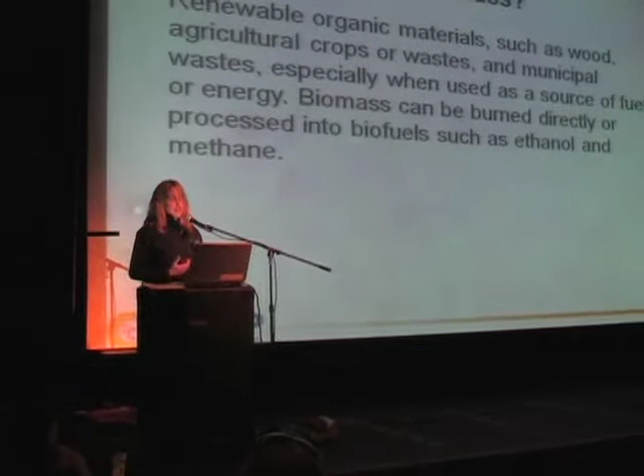Okay, I'm going to go ahead and go right into a little bit of background on what biomass is and what we're going to be speaking about tonight. Essentially, when you go to the dictionary definition of biomass, it's organic materials — wood, municipal waste, agricultural crops — that you can use as a fuel source for energy, and that's really what we're talking about here. It can either be burned directly or processed into biofuels such as ethanol or methane. We're not talking about that here.

There is work being done at the university related to that through the School of Natural Resources and Agricultural Sciences. They're also involved in other work, such as looking at the concept of short rotation woody biomass crops, which is something being done in other places in the world. That work's being led by Steve Sparrow, who's actually here this evening. Steve, can you raise your hand? I can't see him, but he's over there. Okay, great. He's a great resource we have here locally, and unfortunately, because this is such a broad topic, we couldn't bring everyone in to speak. We almost thought about having a phase 1 and a phase 2 for this.

Today we're talking a little bit about combustion technologies, about how you might use biomass for either heating your home or generating electricity.

There's a whole other side to this question, which is where are you going to get that biomass from? Is that from growing a short rotation crop, like Steve's been looking at? Is that from harvesting fire breaks? There's all kinds of different options for sustainable harvesting of biomass for energy projects, and a lot of people involved in that. We've thought about having a separate lecture series on that topic. Let us know if that's something you're interested in hearing about.

It's interesting to note that Fairbanks was actually electrified by biomass back in the 1920s. I don't know if any of you have seen the historic photos of the downtown Fairbanks power plant, but it's a pretty striking image I wish I had thrown into this presentation, showing a fairly non-sustainable use of biomass in the interior.

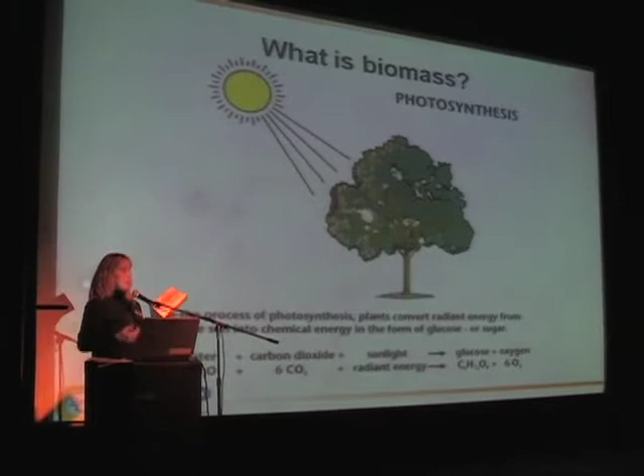Where does this mass come from? When you ask them, a lot of times they'll say it comes from the soil. That's a really common answer—that the tree is pulling up nutrients from the soil, and that's what's creating this wood mass. That's partially true, in that that's where the water content is largely coming from.

But the truth is that this is really stored solar energy in this log. We're taking carbon dioxide from the air and sequestering it in this piece of firewood, or this tree when it was growing, and combining that with water to create glucose and various kinds of carbohydrates, with oxygen produced as a byproduct. So this is basically mostly carbon dioxide that's been sequestered from our atmosphere. When we go ahead and burn this log, it's going to release that carbon that was sequestered during the lifetime of the tree.

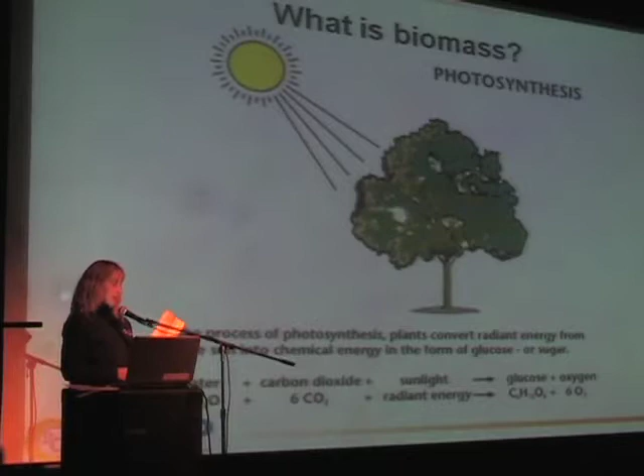So when we consider whether this is renewable energy, it really has to do with whether you're replanting that tree, or whether that land is now being paved over for parking lots or something like that. Then maybe it isn't sustainable, maybe it's not considered renewable. But in general, it's assumed that you're replacing the biomass that you're cutting down for whatever energy use you intend to make of it.

In the lower 48, biomass is actually used quite a bit for power generation, mostly industrial uses—about 80 to 90% is really for industrial technologies. What's generally done is that biomass is combusted, used to generate steam, which then drives a steam turbine. It's a fairly robust, not very new technology, and it's been done on a large scale in many places in the lower 48.

Here in Alaska, until about a decade ago there were 2 large-scale mills in southeast that were using biomass energy for electric generation for on-site use. In the U.S., about 1% of total generating capacity is from biomass, primarily waste products from wood processing facilities, sawmills, and things like that. As a whole, biomass accounts for about 4% of total energy use in the U.S., and that's quite a bit higher than 1% for power generation because of ethanol and fuel production from biomass.

That's become a bigger component of our overall energy use in the state. Worldwide, biomass has been used for millions of years for heating and cooking, and today it's still the primary energy source for half of the world's population—not necessarily for electricity, but for heating and cooking. Europe is currently the leader in clean conversion technologies, using biomass for heating or power generation with reduced emissions. Again, when you're talking about clean biomass, you're still combusting the wood, so you're still getting carbon dioxide. It's just a question of what other byproducts or particulates result, and how you can reduce those types of emissions.

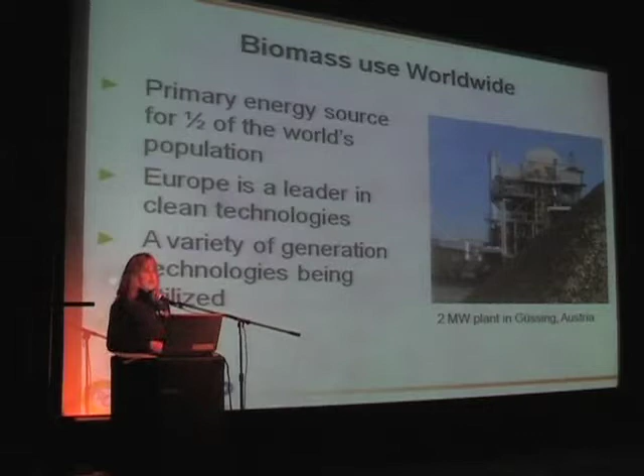Advantages of biomass: it can supply on-demand baseload power and heating. It's available when we need it, unlike wind or solar energy. We know that it's available as long as we have enough wood in our wood pile, enough wood chips, or municipal waste to run our systems. It's available year-round with storage.

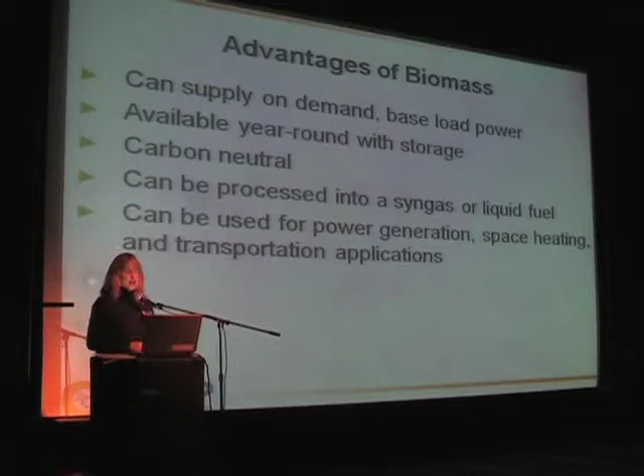It's carbon neutral, we talked about that a little bit. It can be processed into a syngas or a liquid fuel for storage, and it can be used for power generation, space heating, or transportation applications, which is nice as well.

Disadvantages are it's expensive to handle because it's got a low energy density. The number of BTUs in this log is significantly less than a comparably sized gallon of gasoline. So that means it's got to be used near its source, because it's just not economic to transport it long distances. It's labor intensive, which can be a good and bad thing.

What that means is there's potential for more local job creation, because the money you're going to spend to harvest biomass and use it in a system is probably going to be expended locally, close to the source, close to where the fuel is available. That means you're supporting local economic development, often with these types of systems.

Smaller scale technologies for power generation are still emerging. It's challenging at the smaller level to generate power from biomass. We're going to hear about one of those systems that is in development this evening with Chena Power.

And small-scale production of liquid fuels is similarly expensive. This is typical to a lot of the technologies we've been studying at the university, and the fact is that you often can do these things technically.

Technically, it's not impossible to do a lot of these types of things. It's a question of how much money do you want to spend on it, and what are really your goals? Are you looking for an economically viable way to produce liquid fuels from biomass at the small scale, or do you just want to do it at any cost?

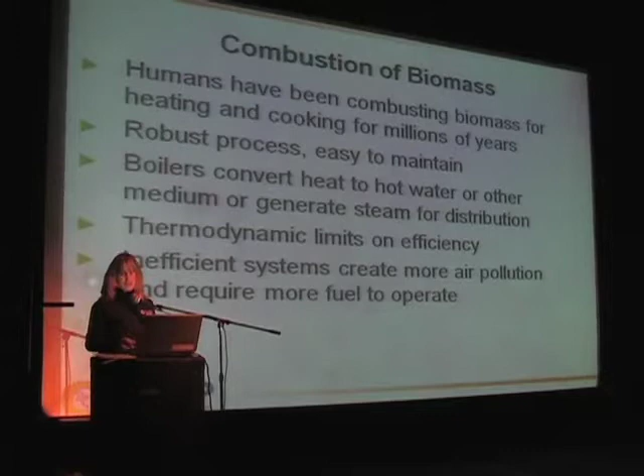There's thermodynamic limits on the efficiency of the combustion process, and inefficient systems, which I think John's going to talk about a little bit, create more air pollution and require more fuel to operate. So efficiency for biomass is an important consideration because there is a cost for the fuel, and you want to make sure the system you're running is as efficient as possible, so it's as economic for the user as it can be.

Gasification involves partial combustion in a low oxygen environment to create a gas, a syngas it's called. You've probably heard that terminology from other places. So it's carbon monoxide, hydrogen, methane, CO2, nitrogen - that's what you wind up getting.

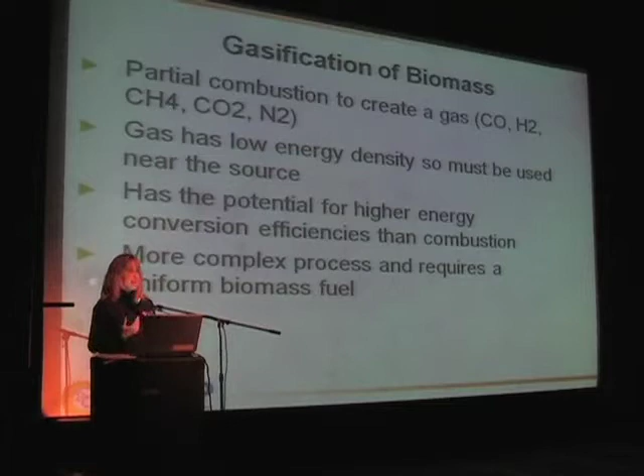It's got a low energy density compared to natural gas or something like that, so again it's got to be used close to the source. It's got the potential for higher energy conversion efficiencies than combustion simply because you have higher temperatures involved, but it's a more complex process. It requires a very uniform biomass fuel, so you need to do usually some pre-processing of the fuel for a gasification process.

This is just a little bit of a comparison between the two of them.

Gasification can be more efficient than direct combustion, but often at small scale there are challenges involved, especially in the economics, integration with other processes, and things like that.

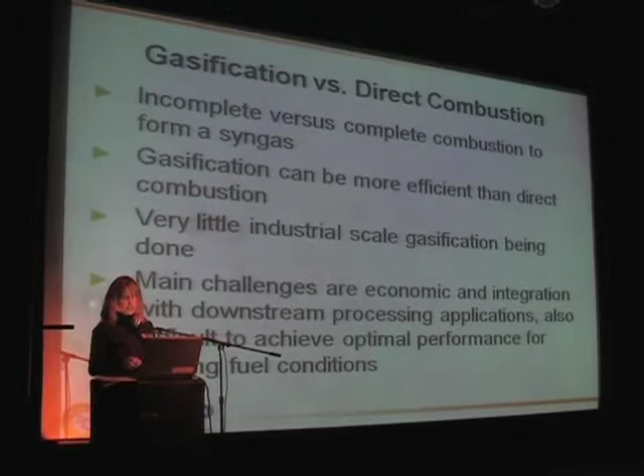So in the interior, there's a lot of different projects going on. I'd really hope that Devany Plentovich, the biomass program manager for the Alaska Energy Authority, could come and talk to us a little bit about that.

In Tok right now, Alaska Power and Telephone and NextEra are working on a biomass combined heat and power system with the State Division of Forestry supplying the wood for that project.

Tanana has two garn boilers in their washateria that have been online since 2007, and they just received a $1.8 million grant from the Department of Energy that's going to significantly expand what they're doing in that community in terms of biomass.

Galena has been working on a proposal, though their project isn't funded, also looking at a project similar to what Tok has going on.

Delta Junction has been doing some wood for space heating applications, and Fort Yukon also has a project that's underway.

So the interior's really taken a lead in the area of biomass energy projects. There's still some research challenges out there.

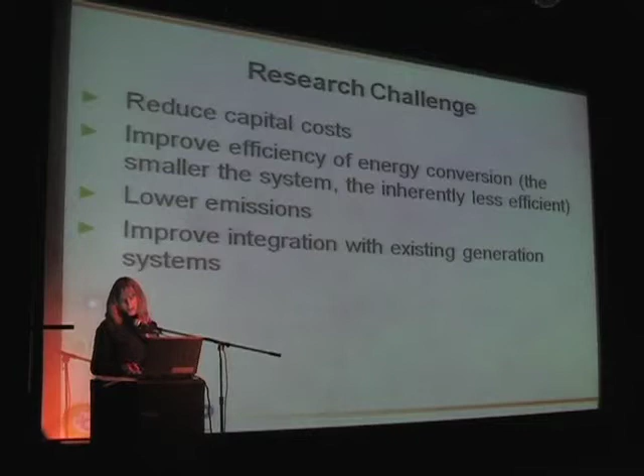The Alaska Center for Energy and Power is an applied research program, so we're always interested in that. Reducing capital costs is a major constant issue with a lot of these types of technologies, so trying to get those capital costs down, improving efficiency of systems. Just inherently, the smaller the system, the less efficient it is. Lowering emissions, and then improving integration with other existing generation systems — those are some of the areas we've been working on from an engineering perspective, in terms of research in biomass.

So, that is all I've got for my presentation.

I would like to introduce, John, are you going to be our first speaker? I hadn't spoken with you guys about that. Where is John? There you are. How about, is that all right if I bring you up first? Is that all right? John Davies has 4 decades in Alaska, and he's worn many hats in that time period. He currently is the senior policy researcher for energy, I think I put those words... I think I mixed them up a little bit, at Cold Climate Housing Research Center, and he's going to speak about residential wood burning issues and solutions. What does that mean?

Thank you. Good evening. Can you hear me okay? Okay. So this is the correct sequence of words, Gwen, right here.

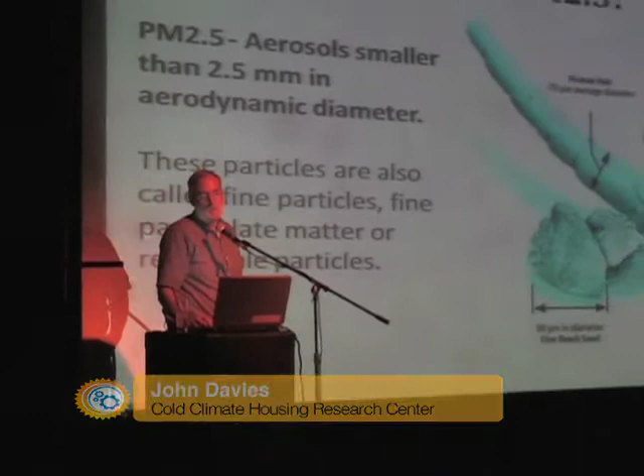Gwen touched a little bit on the question of whether wood burning is carbon neutral, and I'm not going to talk too much about that. A lot of people assume that it is, and it really depends on a lot of things, but fundamentally it depends upon whether your source is sustainably grown.

So the forests around Fairbanks generally are, if you're on public land. So if you're cutting down firewood from the state forest, for example, that's a sustainable source. If you're, like Gwen said, burning wood that's from a clear cut for a parking lot or something, then maybe it's not so much.

But that's a very controversial topic, depends on time scales and lots of things, so I'm not going to get into that.

I'm going to talk more about the issue of particulate emissions from wood burning, and since it's a hot issue for Fairbanks because of the PM 2.5 non-attainment issue, I'll start by saying, what is PM 2.5? In general, PM 2.5 are aerosols that have an aerodynamic diameter of 2.5 microns or less — everything that size and smaller. PM 10 is everything 10 microns and smaller, which includes 2.5.

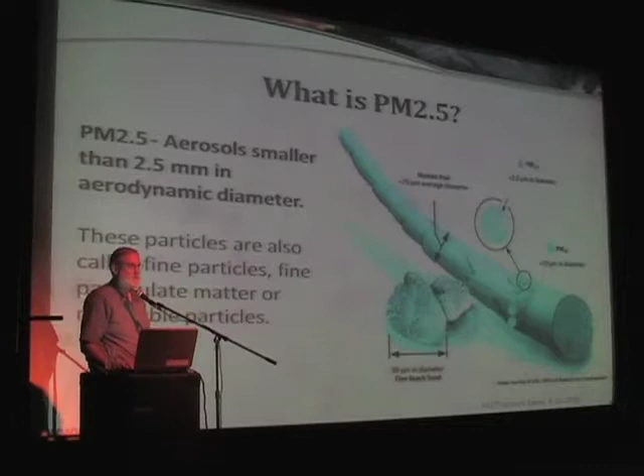So in the case of wood smoke, we're talking about products of combustion from burning wood, and in particular we're concerned about 2.5 microns because that's the size that has been most identified with health issues. There are a number of pathways into the body — you can breathe it, inhale it.

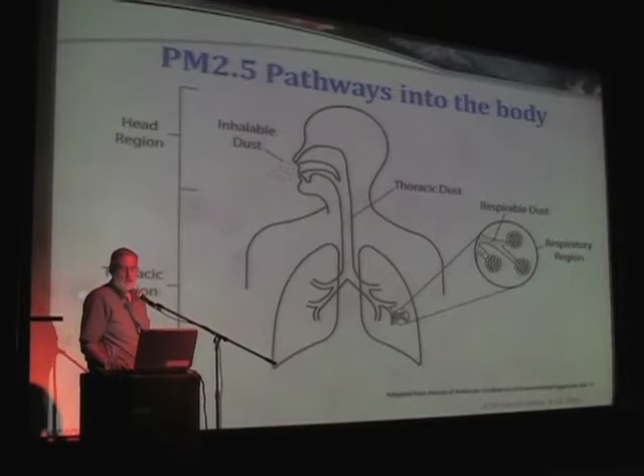The larger particles generally stay in the nasal area, and the very small particles get down into the alveoli deep in your lungs. Here's a distribution of sizes and where they end up — the line here along the bottom shows the diameters.

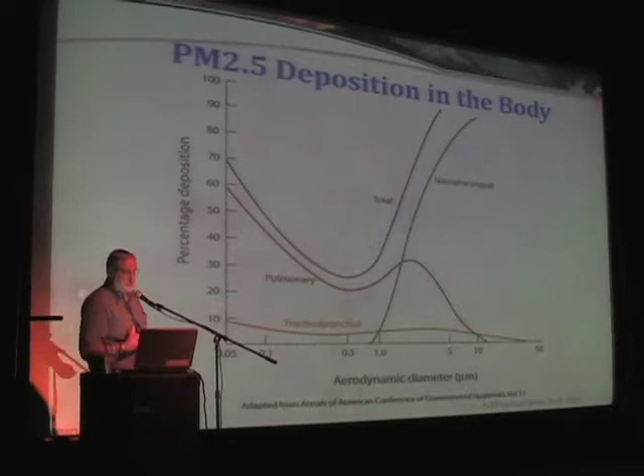So there's this 5 microns, and PM 2.5 is about here. You see there's a peak right here in this red line, and the red line is the deposition in the pulmonary system. So you can see that there's a significant amount at 2.5 and smaller that gets deposited deep into your lungs, and that's the piece we're concerned about from a health point of view.

So this is the first epidemiological data directly from Fairbanks on the issue, a fairly important data set.

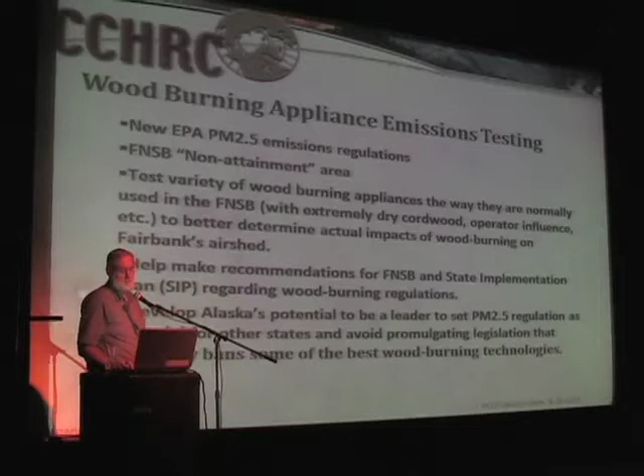So at CCHRC, given the context that Fairbanks is a non-attainment area because of elevated concentration levels of PM 2.5 in the wintertime, and that we have to figure out some solutions to that problem, CCHRC has taken on a number of tasks. One is to characterize the size of the residential burning problem, and also to test some appliances and look at the issues around burning wood in those appliances, different sorts of wood and different sorts of appliances. That's what I'm going to talk about tonight.

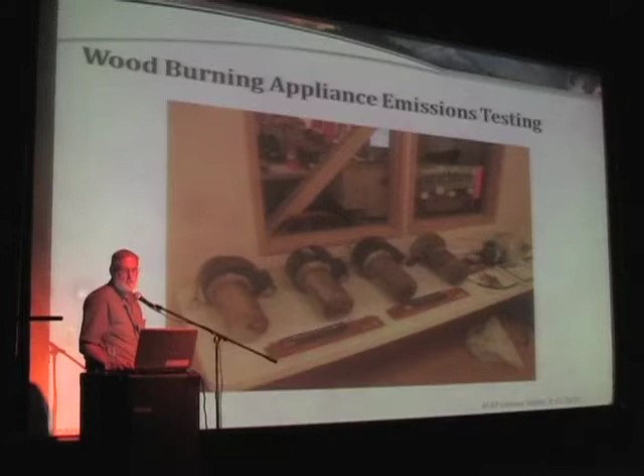So we use devices called CONDAR samplers. These are 4 different samplers we tested in our lab. If you look carefully up high, you can see 4 of them on that stack, and we're intercomparing them. One was actually run in a certified EPA lab in Oregon, so we tested the other 3 against that one to get fairly useful results. We could get the emissions using a standard protocol using the computer here.

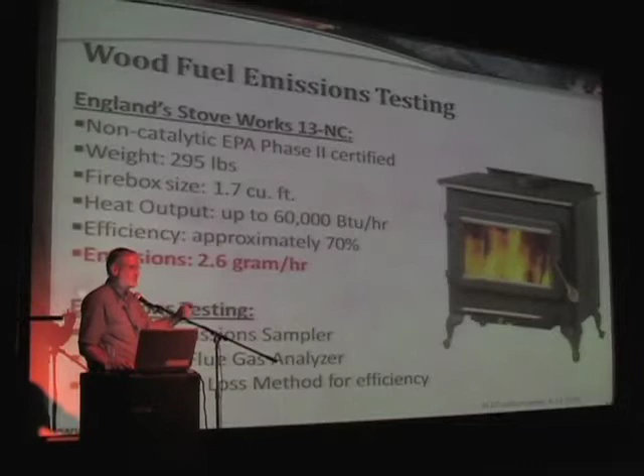The next set of data I want to show you is from testing a wood stove. This is a non-catalytic EPA Phase 2 certified wood stove, and you see in red there, its rated emissions are 2.6 grams per hour. That's of PM 2.5 - all these emissions are of PM 2.5.

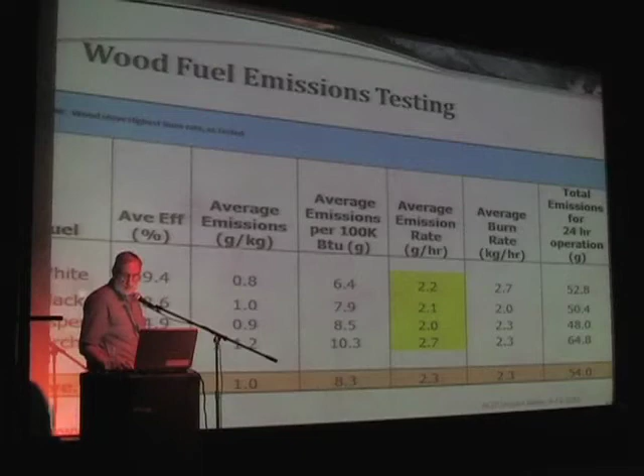So one question is, if you're burning the stove essentially flat out, what if you tamp it down and burn it at a lower rate, restricting the air? What we found was a significant increase in emissions - up to about 14.5 grams per hour when burning at that lower rate, which a lot of people do at night. They stoke up the fires to get it through to the next day. So one consequence is your stove is less efficient and you're getting a lot more emissions per hour out of that stove.

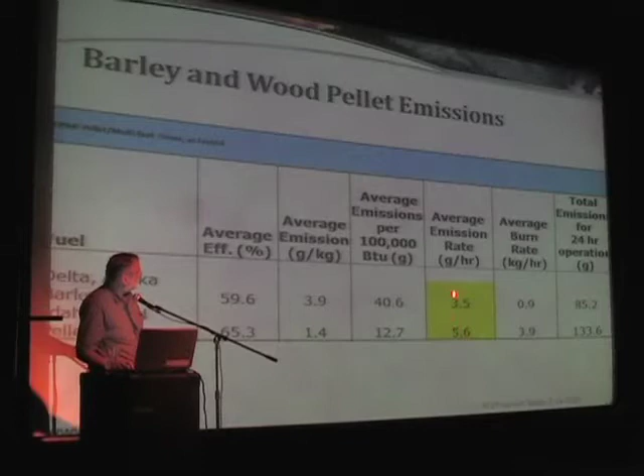We also looked at pellet stoves, including one that would burn both barley and wood pellets. We got some Delta barley and some wood pellets that came from Idaho. Here's the emission rates in grams per hour for comparison - they're a little bit higher than that other wood stove, but the EPA limit was 7.5 grams per hour. It's going to change to 4 something pretty soon, but these would all qualify - they'd be okay.

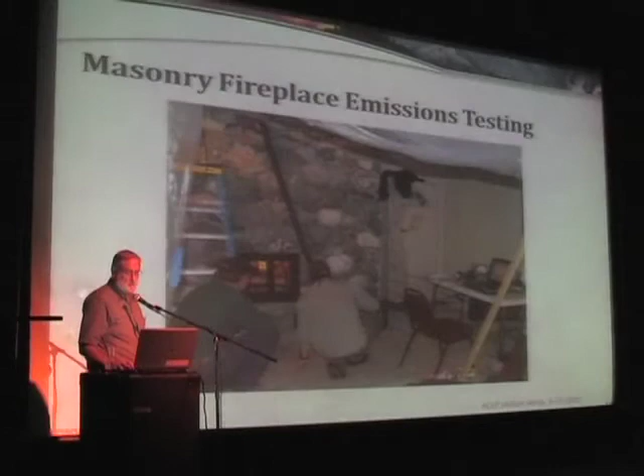We also looked at masonry fireplaces and did some tests on those. This was a project where we modified a fireplace and converted it to a masonry heater, and did the measurements on that.

It comes out a little bit higher in grams per hour, but as you'll see later, because of the BTU output and the fact that you're only running it for 4 hours a day, the grams per day or per BTU output are quite low. You have to remember that you're only running this 4 hours a day in order to get 24 hours of heat.

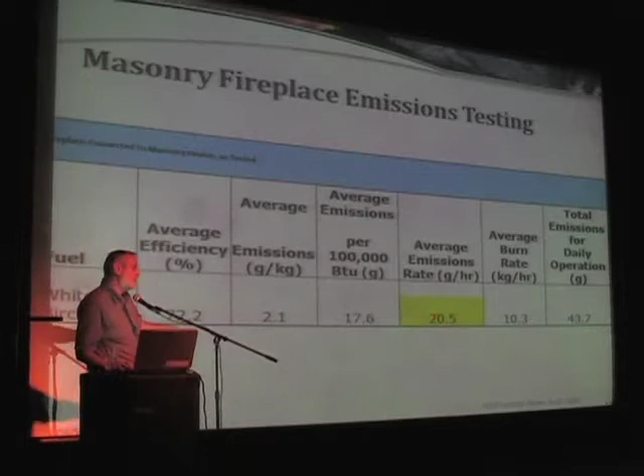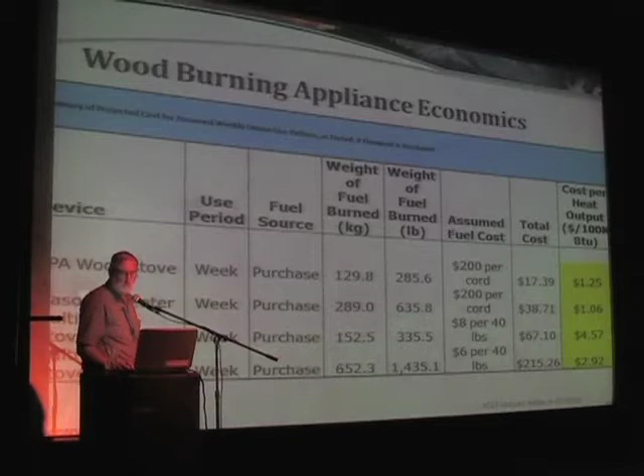So the problem, of course, is these emissions, and we looked at one of the studies that CCHRC did for the borough to look at how much those emissions are. Our calculations were that they are a very significant source, somewhere in the vicinity of 50% of the total amount of emissions, depending on your assumptions about how much the power plants get back in and all that sort of stuff, which is beyond the scope of our study. But clearly, one of the conclusions from our study was wood combustion was a very significant source of PM 2.5 in the borough altogether.

So what are the solutions then? What are things we can do to reduce that? We looked at a wood stove change-out program. Obviously the first thing we want to do is make our houses more efficient, use the least amount of energy that we need. That's the first thing, and that can be very significant. Reasonable things you can do to your house can cut your energy consumption in half for space heating. That's easy, that's the low-hanging fruit. You can go far beyond that if you want to be a lot more diligent. But clearly that's the first thing we should do.

Then the next thing is that we should burn dry wood. For every increase of about 10% moisture, so if you go from 20% to 30%, there's about a 67% increase in emissions and an equivalent decrease in efficiency. Then the next thing we want to look at is more efficient devices, like masonry stoves and catalytic converter stoves. In every case, whatever device we have, we want to burn it hot. We want hot fires, short hot fires, but we don't want to be tamping it down or having smoldering fires because they create enormous amounts of emissions compared to what the stove does when it's running hot.

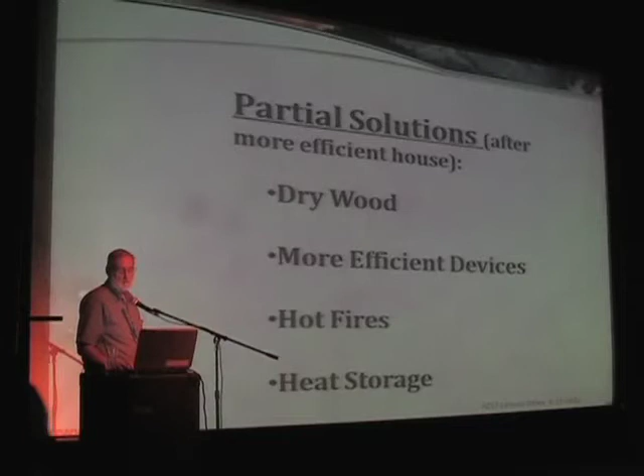Drying wood isn't too complicated. If you split and stack it, cover the top of the pile, and season it for approximately 6 months, you're good to go. It'll be dry enough, probably below 25%. There's all kinds of variables, and we are actually doing a study right now to characterize those variables in drying wood. But since we're doing it as a contractor to a subcontractor to the state of Alaska, as a subcontractor to the borough, I can't show you the data right now, but it'll come out pretty soon. It's not inconsistent with what I just told you.

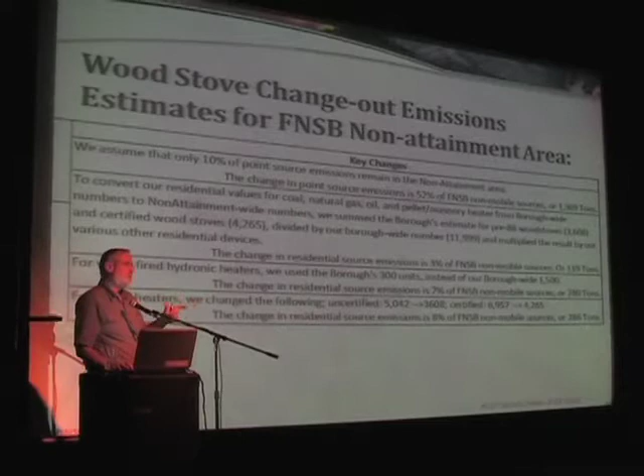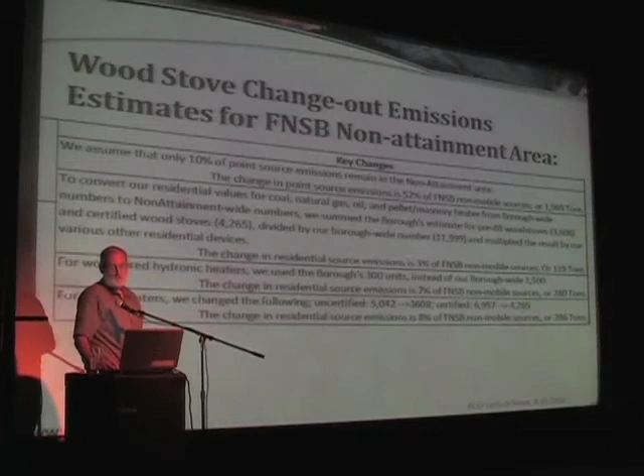The other thing I told you that we did is a wood stove change-out, a wood stove emissions inventory. And one of the questions we used with that inventory was, suppose we did a wood stove change-out program and converted all the non-qualifying wood stoves to qualifying wood stoves. That's what the change-out program is intending to do. I'm just going to skip ahead here.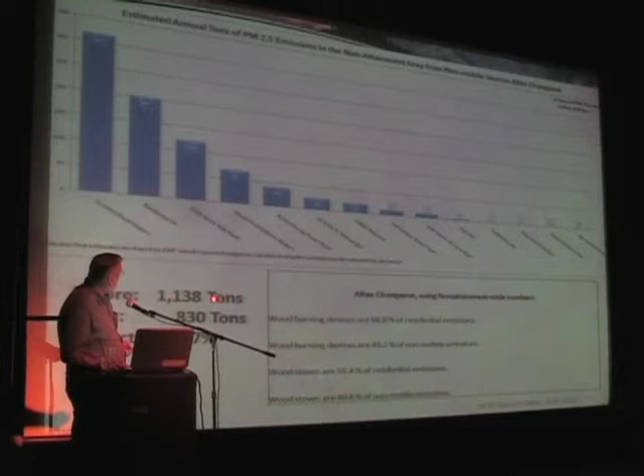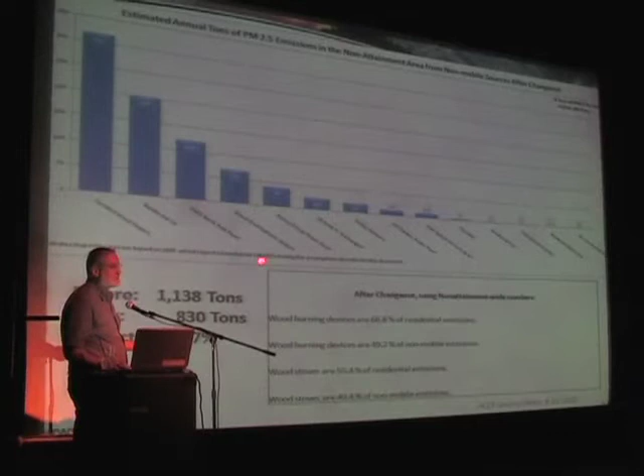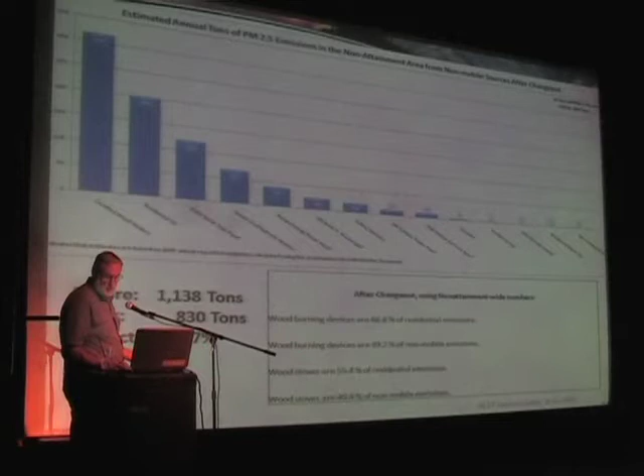So here's the bottom line: wood-burning devices generate a little more than 1,000 tons per year of PM 2.5 at present, under pretty favorable assumptions. If we simply did a wood stove change-out, without addressing hydronic heaters, our calculation is that we would reduce that number to 830 tons, about a 27% decrease. This includes the GVEA and Aurora power plants in the mix, assuming those plants contribute their permitted value. It's likely the actual numbers are much less than the permitted values, so probably this reduction percentage is much higher. A change-out program can be a very significant contributor to reduction in PM 2.5 in the borough.

I talked a little about the issues of running a wood stove hot, and showed you data about roughly a factor of 7 increase in emissions for a qualified wood stove if you just ran it tamped down. So another option is to get a catalytic wood stove. One advantage of the catalytic wood stove is that you can run it at a much lower rate and still get high efficiencies because of the catalyst. It's still not quite the total overnight burn, but it's getting close to it. That's definitely another option to consider.

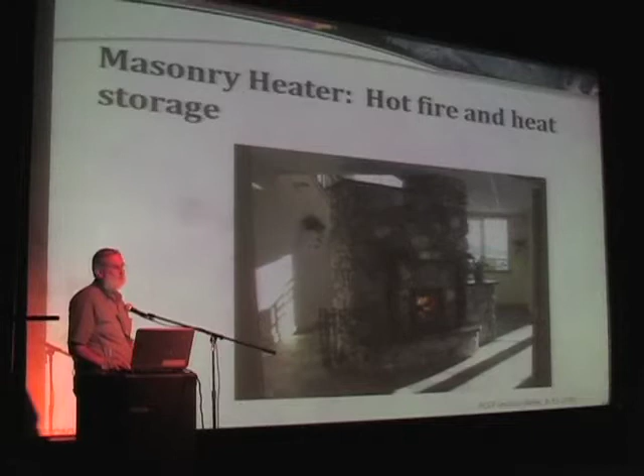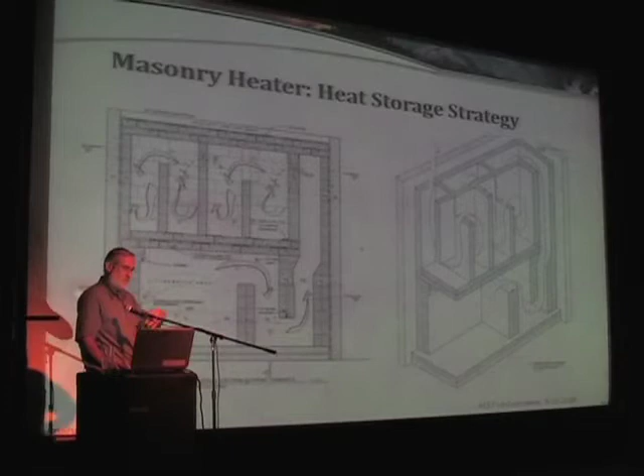Masonry heaters obviously don't work for everybody, and they're relatively expensive compared to other sources, but they have real advantages. They're very efficient. You run a very hot fire in them, and because of the convoluted flue path through the masonry, the heat is stored for 24 hours. So you run a hot fire for 3 or 4 hours, and then that heater radiates heat for the rest of the 24-hour period. Averaged over a day or a week, as shown in those week-long comparisons, they have very low emissions compared to any other burning source.

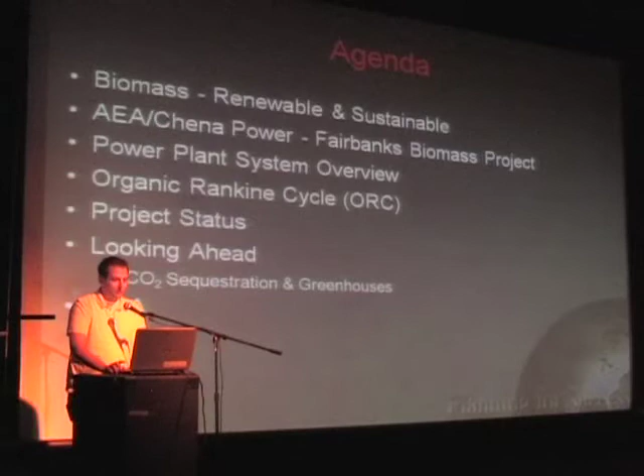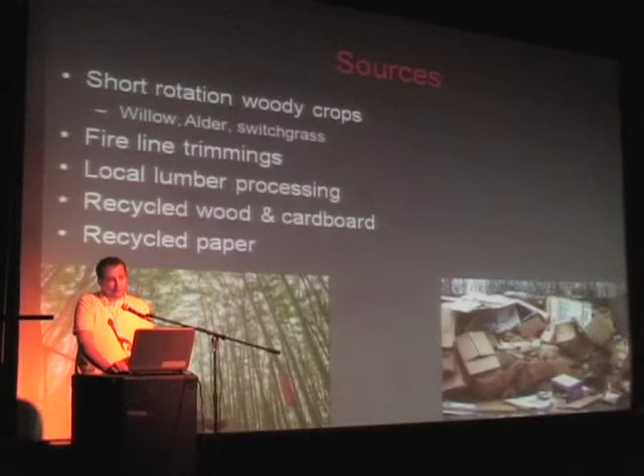As Gwen touched upon, the sources of biomass can vary. There's short rotation dedicated energy crops, or woody biomass crops, and typically those would include things such as willow or alder, switchgrass, or miscanthus, but the grasses typically don't do as well in Alaska. So if we were to do a short rotation woody crop, we would probably look at willow.

There's also fire line trimmings. The state has to cut fire breaks in order to keep fire suppressed and have backup areas where they can stop the fire. So a few months ago, we went out with Mark Lee of DNR and looked at the possibility of procuring biomass trimmings from that. Right now, they're just basically left there and they phytoremediate back into the ground.

We're also looking at local lumber processing. Superior Pellets is also another potential source. They have a requirement that they have to have a certain type of wood, a certain composition. There'll be defects with that, and we believe that we could use those defects in our power plant and scrub those out. We're also looking at recycled wood, cardboard, and paper, avoided items from the landfill. Our sister company, K&K Recycling, actually just procured a deal with Fort Wainwright to get recyclable material that could be used for this project.

So some facts about biomass: it's an abundant resource in Alaska, especially here in the interior. If you look around outside, there's potential sources everywhere. In a lot of the remote villages around Alaska, it is also a viable source. If you notice, we had our Chena Power Quarterly, and on the front it says, 'Do what you can with what you have where you are.' So that's kind of our motto. We're looking at what the villages have. They may not have geothermal, they may not have hydro, but just about everybody in Alaska has biomass.

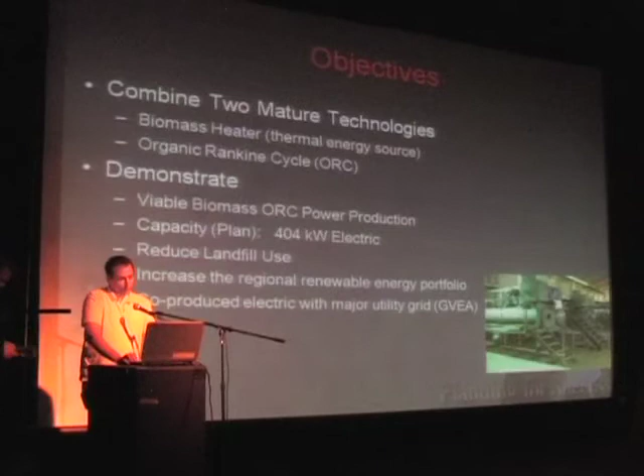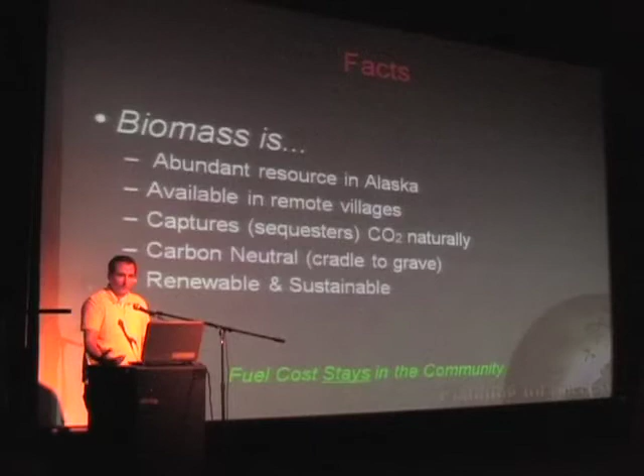As John and Gwen both talked about, there's carbon neutral properties depending on how you do your biomass power plant, and it's renewable and sustainable. So your fuel costs stay in the community. It can be a little bit more labor intensive, but again, that's local job creation.

So our objectives when we set out to do this project were to make a biomass heater, a thermal energy source - that's our primary mission. Our second is to combine this technology with organic Rankine cycle technology and basically marry the two together. So as I mentioned in the beginning, this is a demonstration project, so we're looking at the viability of combining ORC technology with biomass. We also planned initially for a 404 kilowatt electric output.

Our goal was to reduce landfill use by diverting paper, cardboard, and wood waste that's currently getting buried, and to increase our renewable energy portfolio in Alaska. Biomass is an up-and-coming technology, but in the United States, it's a fairly mature technology that's used all over. And we also wanted to co-produce with a major utility grid to prove that it can be done safely.

Our goals here are to replicate this in rural Alaska. Basically, we want to take this technology, demonstrate it, prove that it can work here on this demonstration project, and then take that to where energy costs are the highest, and that's rural Alaska, obviously.

We wanted to design this power plant to be modular, something that could be skid mounted. We didn't want a lot of labor or work to have to go into setting it up. So we want something that can be designed on skids, brought up on a barge, and taken off the Yukon into a village fairly easily.

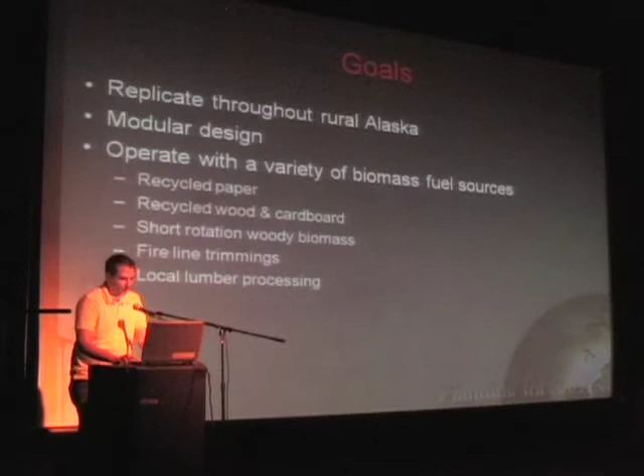Our project description: it's near 3 megawatt gross thermal energy, meaning the total energy output. That's not necessarily all energy that's harnessed, that's how much potential energy is there. Our ORCs are designed to generate 500 kilowatt electric output, and that's because they are actually very efficient permanent magnetic generator turbine technology that Jesse will touch upon later.

We are planning to use some district heating. There's always the possibility to expand your district heating in the future, but if you expand it too much, you may lose some capacity with electrical generation. We've set up to district heat K&K Recycling and Chena Power's corporate office to do the district heating there. The power plant will be carbon neutral initially.

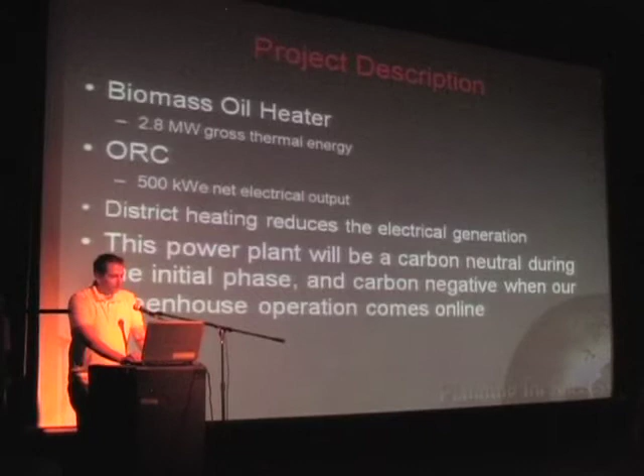We are planning to do some tests and studies to see how carbon sequestration may work with a co-located greenhouse setup.

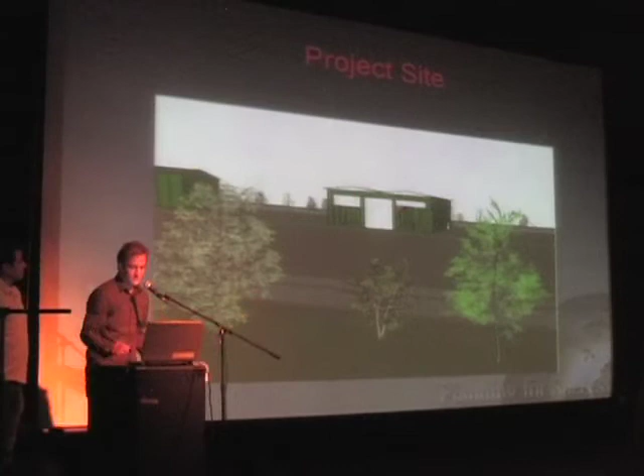This is our project site here at 9 Mile Richardson Highway. I don't know if you've driven by, but we've done a lot of cleanup on the yard, painted the building. The building you see here is where we're going to put the oil heater and the turbines, the ORC.

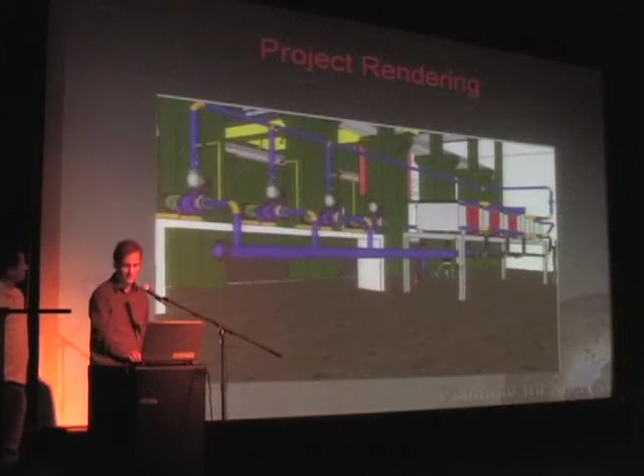Here's a little schematic of the system we're doing. You can see on the left there's the turbines, on the right there's the heat exchangers. Those are brazed plate heat exchangers, different than what we have out at Chena. They're a lot smaller. There's pluses and minuses to it.

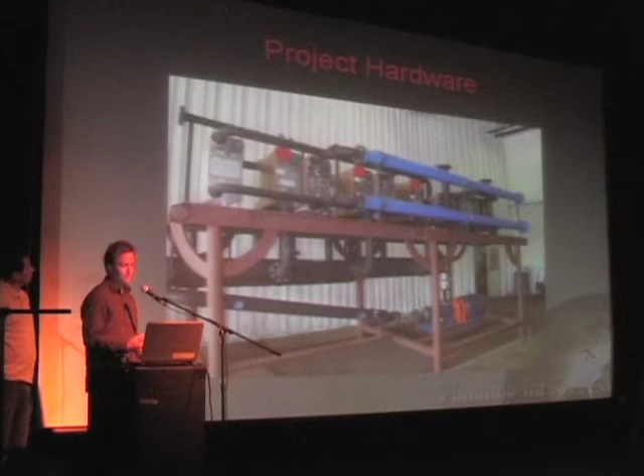Here's what we've built so far. This would be the bottoming cycle of our power plant. You can see there's 3 sets of recuperators and condensers, 2 evaporators and 1 preheater. You can see the cold water is the blue pipe that comes in to condense, and the pump there for the refrigerant.

It's shipped on the 13th, and it should be here some point in September, and we'll start installing that. We're going to heat oil rather than boil water for a number of reasons. One is that if you're in a rural application and have problems with water at 40 below out, you're going to have freezing problems, and this negates that. There's also a lot of expensive maintenance with boilers rather than oil heaters because you don't have the high pressure that you would with a boiler.

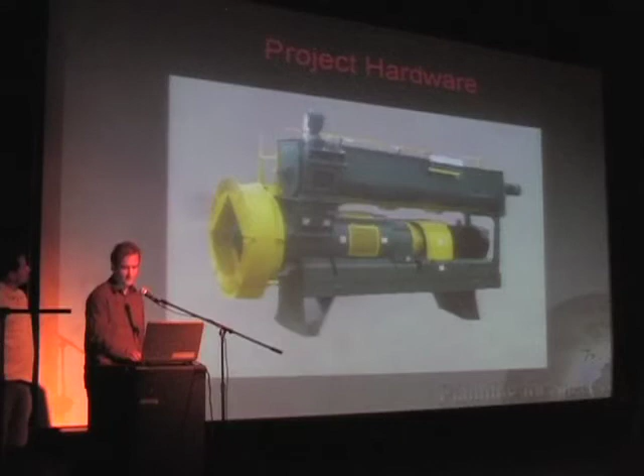Here is part of our fuel processing equipment. This is a cuber, it goes with a shredder and hogger, and here's how we plan to operate 24 hours a day, 7 days a week. As far as our fuel processing, there's quite a bit of energy, so we only need to operate about 4 hours a day for the 500 kilowatt production. Our plan is to just shred and not cube the biomass, but we're going to install the cuber just in case we need to cube it.

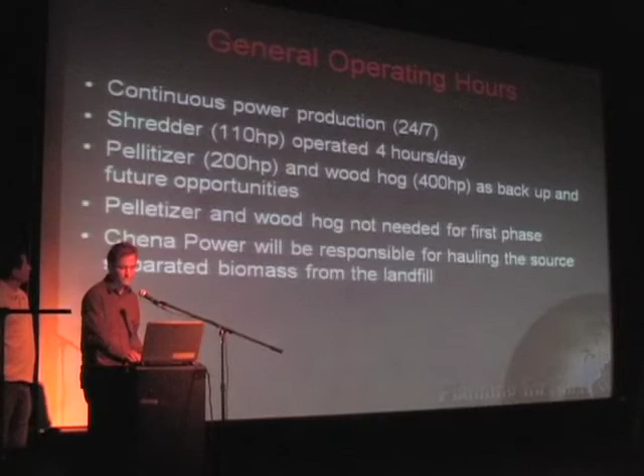As far as safety, that's been one of our major concerns. That's one reason we went with the ORC and heated oil rather than boiler, because you don't have the high pressure. We'll have an overflow tank for the oil in case it gets too hot and starts to expand. We'll have lots of controls and monitoring, and for the first year we're going to have somebody on site 24 hours a day just to make sure it's safe and that if any red flags come up, somebody's there to take care of it.

We're going to be connected to the Golden Valley grid, which is where we'll be distributing our power. There's obviously a lot of grid protection equipment we'll have installed on site, so that in case the power goes down, we shut down and aren't putting electricity where GVEA thinks there's no electricity.

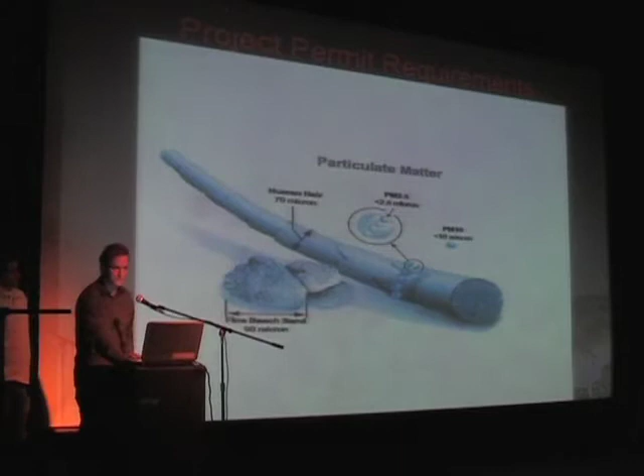But we would be ready to clean the flue gas if needed, especially with the 2.5 particulate standard, which is starting to come around, as you've seen in this picture previously. So one of the emissions we might have to deal with—depending on what you're burning you get different emissions—but with what we plan on burning, we don't have to deal with much.

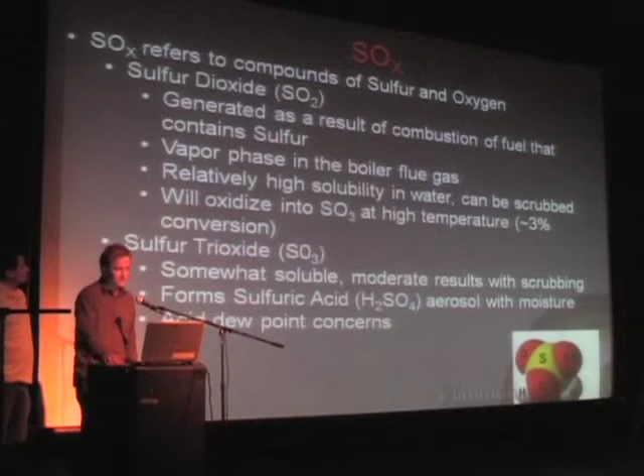If we did have to deal with SOx, we would probably wet scrub it. It wouldn't be too hard to install anything to do that. Same with the NOx—mostly you can just wet scrub this as well.

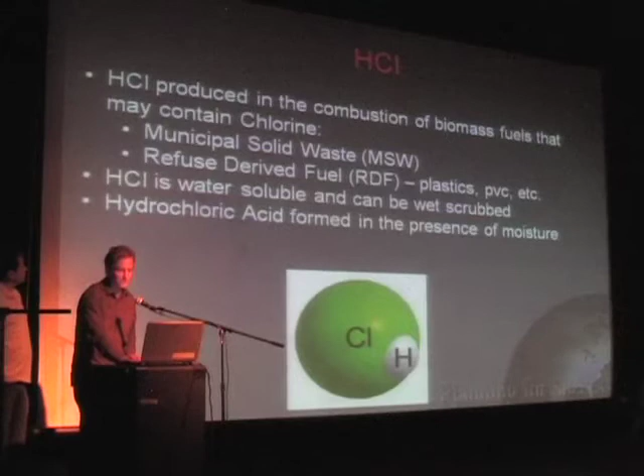The hydrogen chloride, or HCl, we don't anticipate having much of at all, so it's kind of a non-issue, but it is cleanable—it's highly acidic, so a base can scrub it pretty quickly. And mercury, as you can see from our chart, we didn't anticipate much of—it's not even on there. But we don't anticipate much mercury, and it's something we'll obviously look out for in case we do. We'll be ready to clean it.

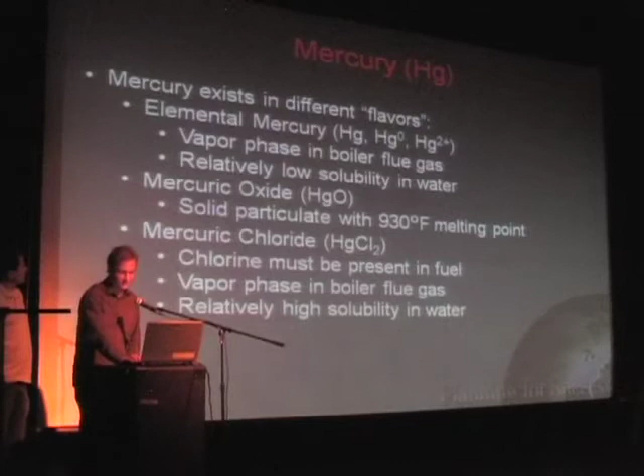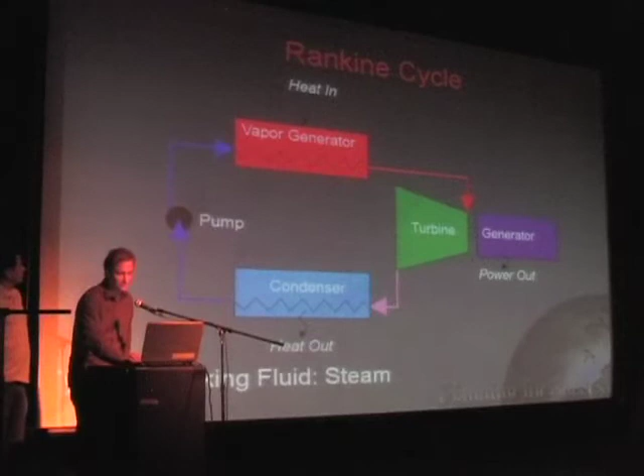As to the ORC, this is a description of a Rankine cycle: just steam generation, heat in, evaporates the water, spins a turbine, runs the generator, then condenses, and gets pumped back into the evaporator. The difference between the Rankine cycle and the organic Rankine cycle is just a carbon-based fluid rather than water. Same deal—you heat the refrigerant, run the turbine, spin the generator, condense the refrigerant, and it goes back into the pump.

We're pretty much expanding on what's been done out at Chena. There's been pretty good success out there with the ORC, so we want to continue working with UTRC, who Chena worked with on that, and develop this technology a little bit further.

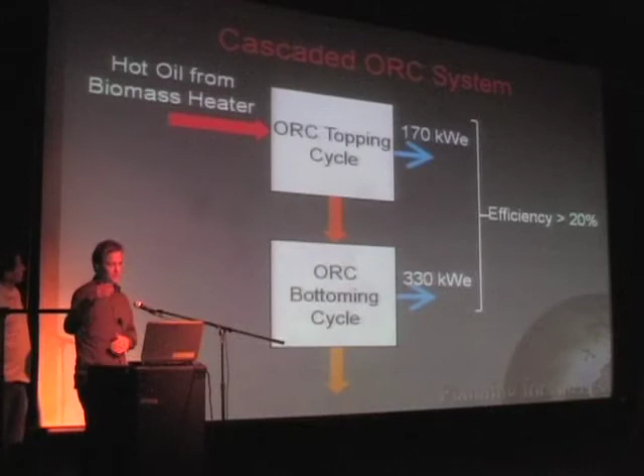Here we're going to cascade our ORC. Out at Chena they're running at about 160 degrees; here we're going to have the oil at about 500 degrees. So we'll be able to have a bigger temperature differential, which will allow us to run two different cycles rather than one. We'll have two different refrigerants that run at different temperatures.

The higher temperature refrigerant will condense while the lower temperature refrigerant evaporates. So we'll have two different cycles, and you can see we'll get 170 kilowatts from the topping cycle and then 330 from the bottoming cycle. Our efficiency is going to be pretty high at 20%. Out at Chena, I think it's about 8%, from what I remember.

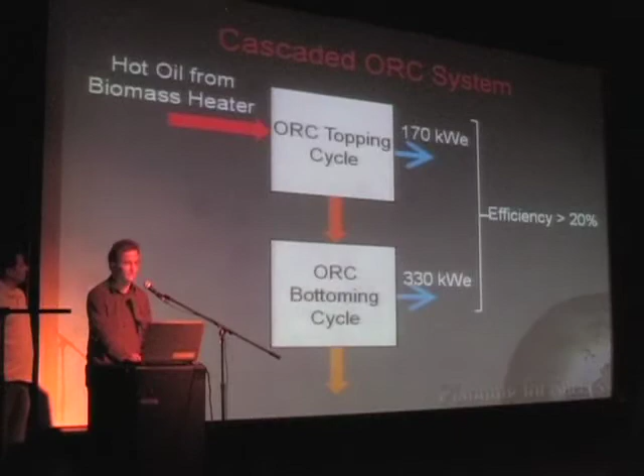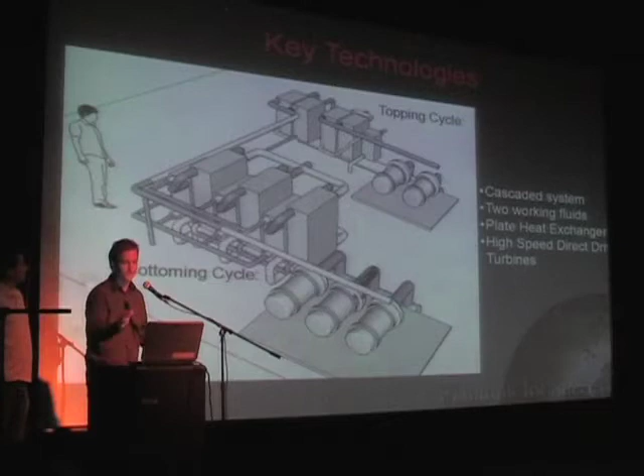Here are the high-speed direct drive turbines. This is also different than what's out at Chena—there, the turbines spin at a much lower velocity than these will. These will also have magnetic bearings to increase efficiency, so you don't have to worry about oil since we're going to have a lot of high temperatures. You don't have the oils breaking down and getting into the refrigerant as well.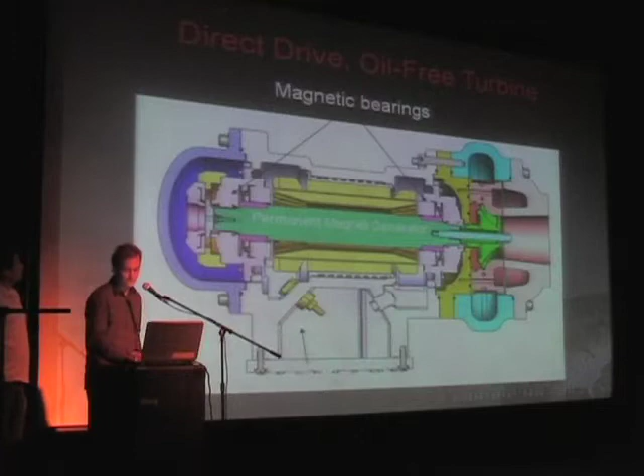Here's a CAD analysis that UTRC has done. You can see the strength of the housing for the turbine.

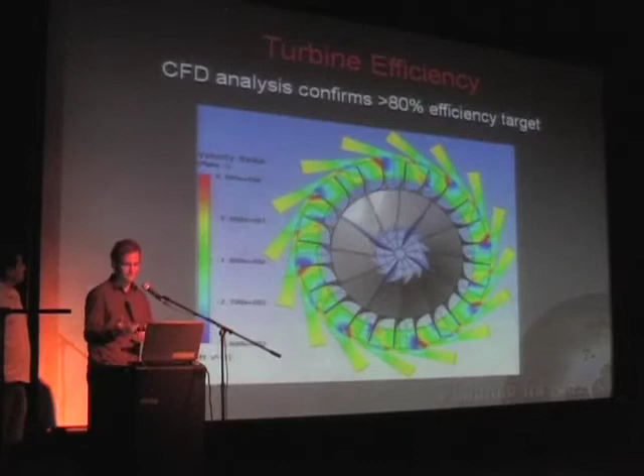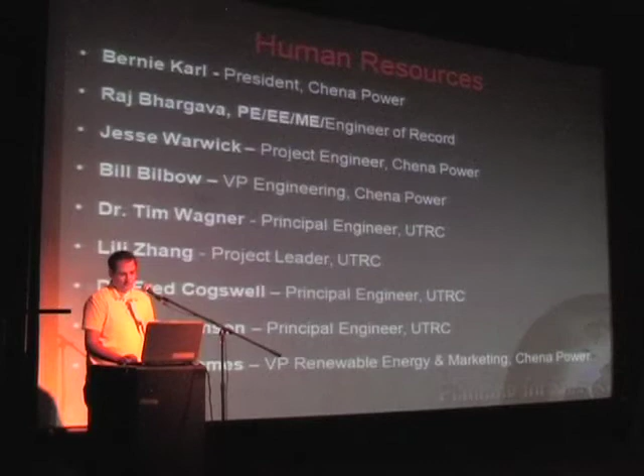Our human resources are probably our key thing. Bernie Karl, as most of you know, is the president of Chena Power. He's dealt with a lot of projects, grids, tie-ins, and different utilities around the state. Raj Bhargava is our PE, ME, and engineer of record on this job. And of course we have Jesse Warwick. Bill Bilbo is also a mechanical engineer. And then we have our team from UTRC that is advising us, we meet with them weekly. And then, of course, you have myself.

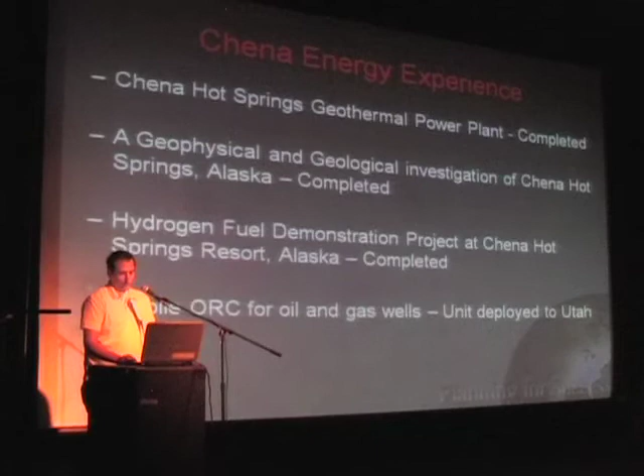Some experience we've had in the past, most of you are familiar with the Chena Hot Springs geothermal power plant. We've also done various surveys and tests on the property and our reservoir. Recently we finished a 100-year projection, and we also completed a hydrogen fuel demonstration project. We have our mobile ORC unit, which you may have seen last year at the Renewable Energy Fair, that powered some electricity over at Aurora Energy, and is now down in Utah making energy.

Looking ahead, we're looking beyond Fairbanks once we prove this demonstration technology. Alaska villages have the highest cost, so that's where we're looking at placing one of our first units after we prove our demonstration technology. They have access to large quantities of biomass. It can be used for combined heat and power, which would make sense in a rural setting, and it could be co-located with greenhouses, which is a future expansion of our project. Not only do rural villages have high energy costs, but they also have high food costs. It is a labor-intensive process, but that does create local jobs.

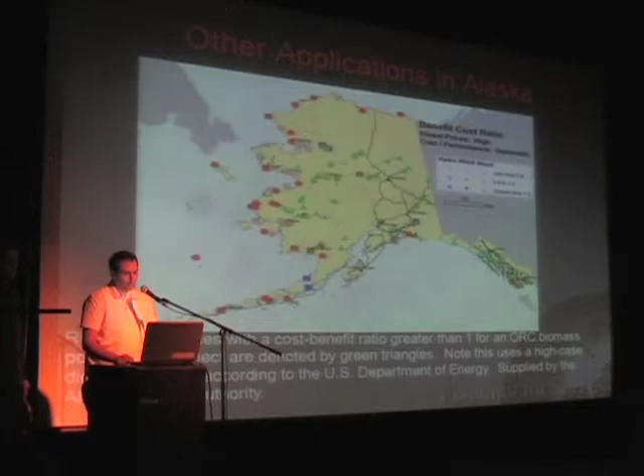This is an application map for energy portfolios from around the state of Alaska. I'll give you a minute to look at that. The green is biomass, the blue is hydro, and the red is wind power.

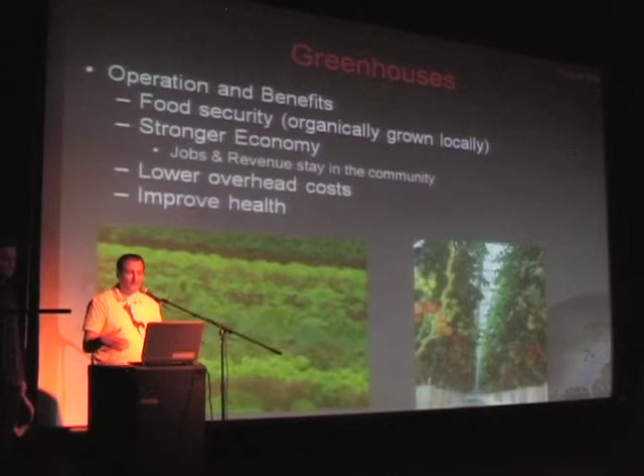Greenhouses obviously would offer a lot of benefit, and this is where we're heading. Food security is a growing issue, especially here in Alaska, where we import over 98% of our food. That would also help the economy and create more jobs, so not only would you have technicians working in the power plant, but also people working in your greenhouse, with a distribution chain tied to that. This would help lower your overhead costs, and in the long run improve overall community health and quality of life.

So, Gwen, I guess we're done here. I don't know how we're going to do questions, so I'll turn it over to you. Thank you.

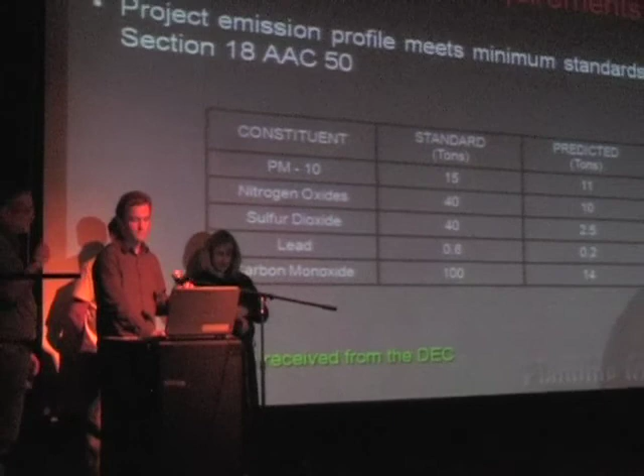The question was about permitting for the project with regards to the DEC numbers shown on the slide. According to the 18 AAC 50, we are not required to get a construction permit for this project if we are under those numbers.

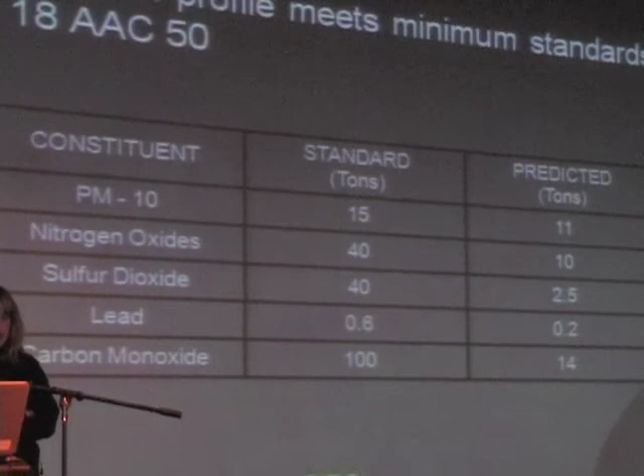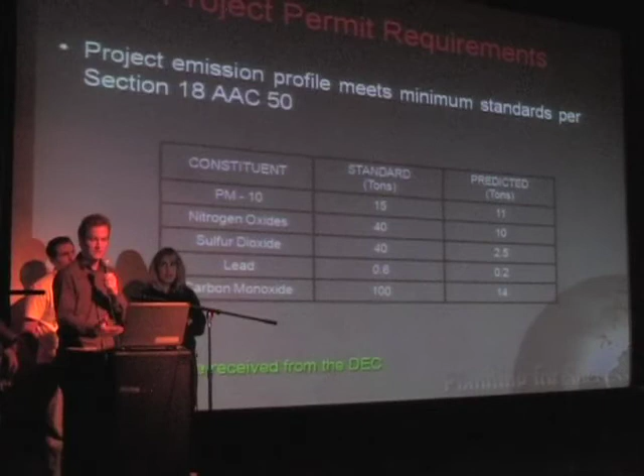In terms of plans at this point for the platted site, you're expecting it'll be under the limit, so you're going to go ahead and start burning in November without worrying about the permit? We're under the threshold, so we're going to go ahead and burn and not worry about permitting, but we're in close contact with DEC—we've talked with them today. We're being diligent about this so we're not going to surprise them with anything. No, we don't need a construction permit, but we are working closely with DEC because where we're located is one of the more important areas as far as emissions.

Just a couple more questions. Any more out there? Right there.

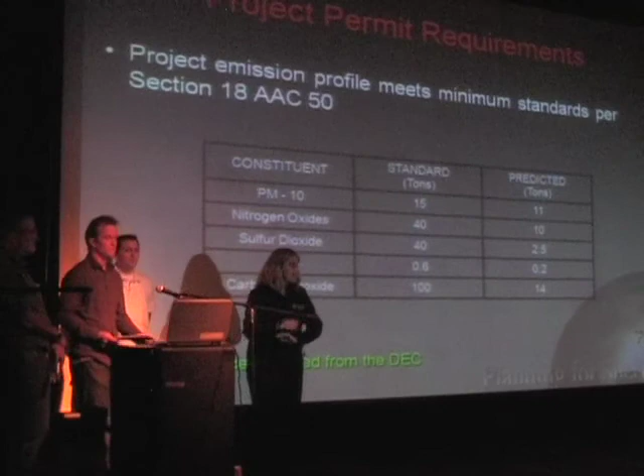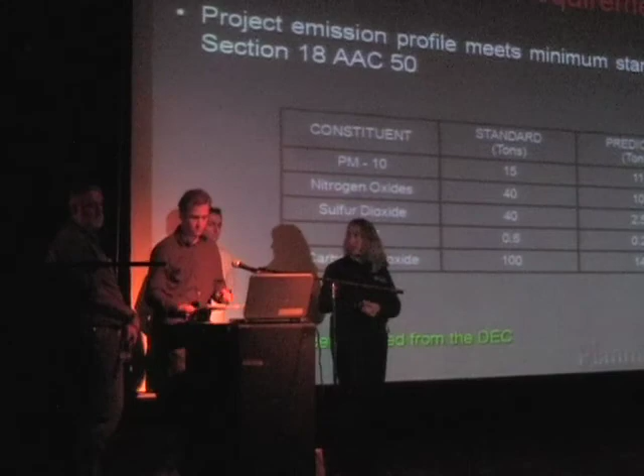This is for Chena Power—are you guys going to consider doing a voluntary source test, just for the research aspects? The question is if we're going to consider doing a voluntary source test to gain knowledge, and that's something we are looking into—getting instrumentation to monitor what we're outputting, so we have data to back up what we're doing, and it helps promote what we're doing if we can show it.

One more question—go ahead. On your generation, are you looking to go online with the grid for baseline demand or to handle peak demand? The question is whether we plan on serving baseline demand or peak demand. We plan on producing 500 kilowatts 24 hours a day, so I guess baseline would probably be the answer.